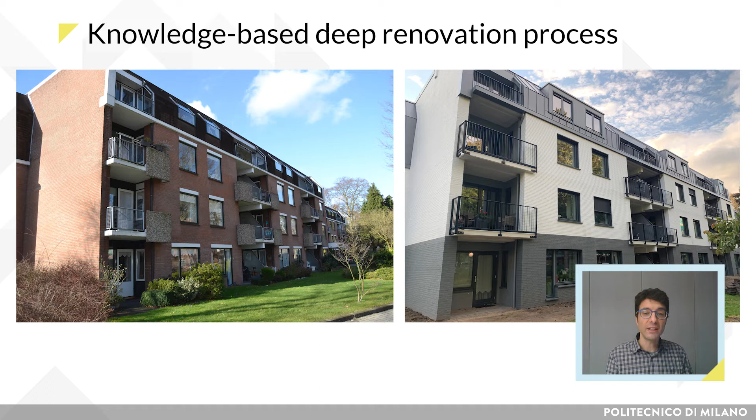process and made of building auditing and pre-renovation monitoring process to obtain a first baseline, information on possible technology solution sets, calculation of potential improvements and related uncertainties, achievable performance results, economic impact up to the next renovation. Continuous monitoring whose results will constitute an improved baseline from which begin decision-making in further building renovation or building maintenance.

Indeed, deep renovation is a building life cycle investment that has to start at the right moment according to the running conditions and performances. I will now introduce you all stages in detail. The core activity of the 4RinEU deep renovation process is the facility management, as owner or facility manager checks the effective operation and performance of the building.

In case of problems not easily solvable, the detailed 4RinEU energy audit protocol provides support for the collection of the proper information and to understand if a simple maintenance or a deep renovation is needed. In case of intervention need, the audit provides the drivers for deep renovation, identifying the main needs and deficiencies. The audit also collects building owners' needs and requirements that become the deep renovation drivers.

To support the auditing phase as well as operational and maintenance one, the 4RinEU answer is to gather, organize and process building information, energy use and indoor environment data. The auditor goes on site to collect basic information on the status of the building as is, to be able to get an accurate baseline of the building's performance ahead of the deep renovation design. The amount of data that an auditor collects in this phase can easily become significantly large and difficult to manage.

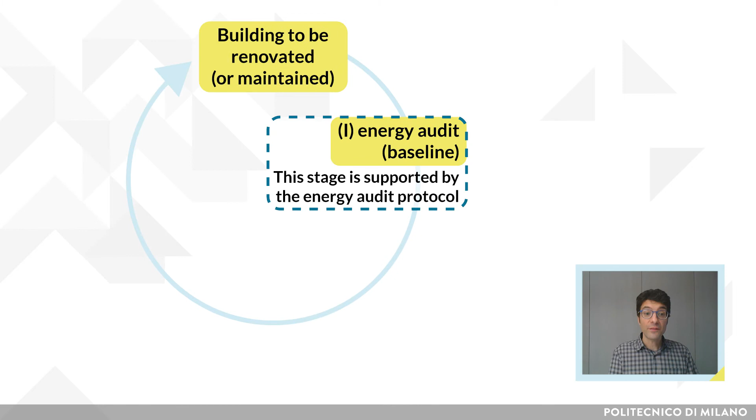After auditing, the decision process is supported by the Cost Effectiveness Rating System, a decision-making tool allowing to address the best deep renovation package, considering energy consumption, comfort, cost, timing, and environmental impact, as well as the level of risk and possible subsidies, with the aim to facilitate the investment of the owner.

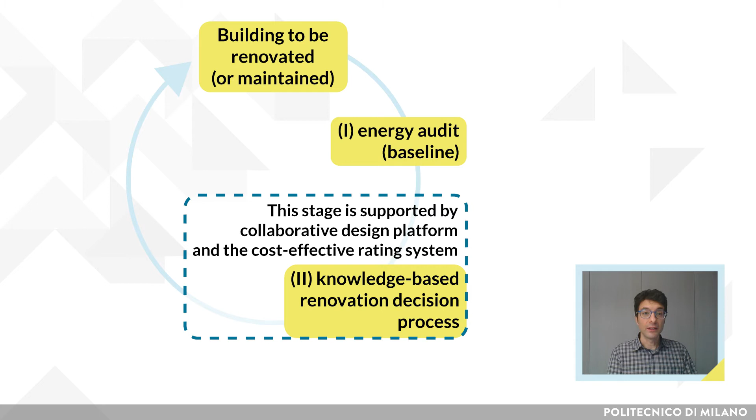The 4RinEU team developed sets of state-of-the-art renovation packages designed to optimize the investment for transforming energy-consuming homes with energy saving up to 60% while enhancing indoor environmental quality. The 4RinEU packages include key innovative solutions and standard products whose integration was optimized to ensure reliable and robust results of the deep renovation process.

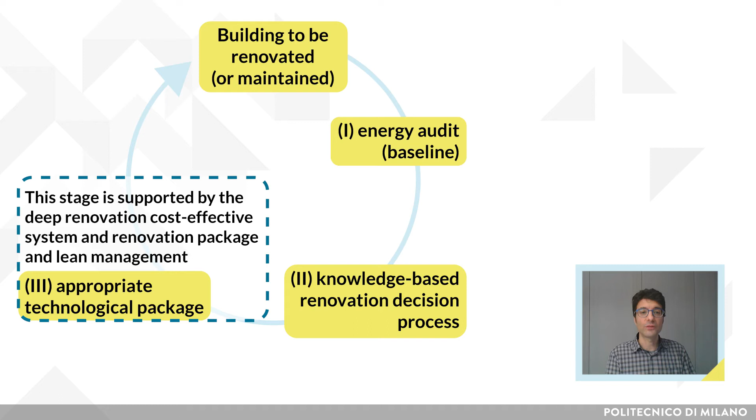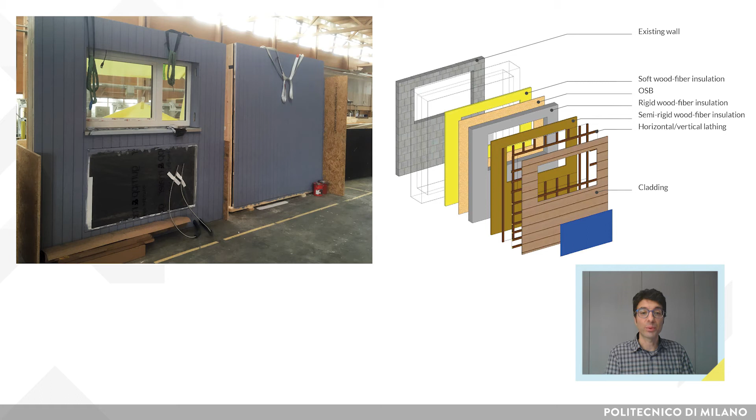4RinEU technology packages include a prefab timber building facade integrating ventilation unit, energy production, and solar gain control components, tackling heat loss and condensation problems while contributing to energy balance and comfort. A hydronic module that can be monitored to optimize the demand for heating and cooling in conjunction with the integrated renewables in order to provide a match between thermal energy demand and production.

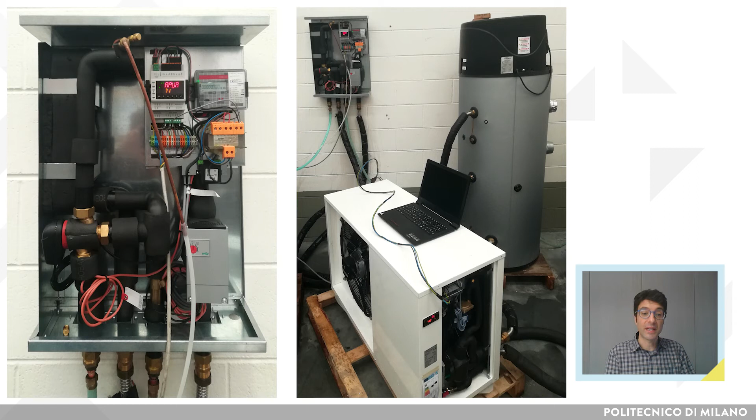A smart ceiling fan that automatically adapts its speed depending on indoor and outdoor environment conditions. A tool for optimal harvesting of renewable sources to produce energy to cover demand profile. These packages are modular and industrialized products, which means that on-site works can be meaningfully reduced while guaranteeing higher quality and performances. To give you an example, it can take half of usual renovation time, which means that there is limited disturbance for residents who can stay home during the renovation works.

It is important to notice that the renovation decision-making process is usually mainly driven by other factors than energy audit. For instance, the subsidies established for a particular technology, the minimum performance requirements to be achieved, and the technology commercial advertisement with poor technical information. However, the cost effectiveness of such commercially available solutions is usually founded on basic models and generic considerations that often bring very uncertain savings, leading to a gap in the performance prediction.

For this reason, collection of monitoring data both for the pre-renovation state of the building and the post-renovation performance is another important aspect. Data can be used in the dynamic modeling of the deep renovation project for two main things. The first is to ensure that the virtual behavior of the building is properly calibrated and it is as accurate as possible. And the second is to evaluate the efficacy of the renovation once completed.

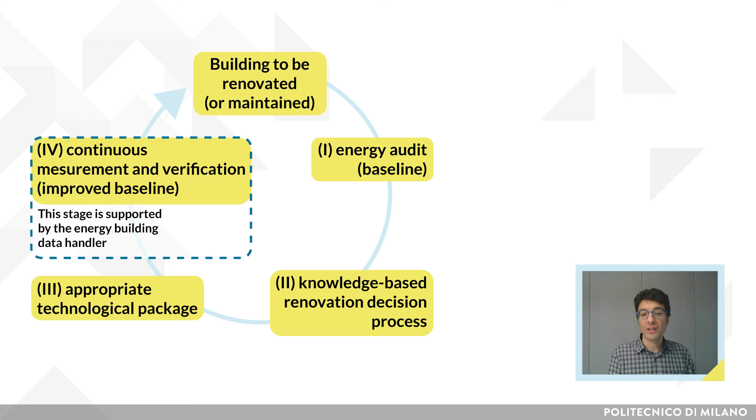Monitoring data can be displayed through custom dashboards to the users. In this way, it can be said that the 4RinEU approach transforms data into information and knowledge for the stakeholders in the renovation value chain.